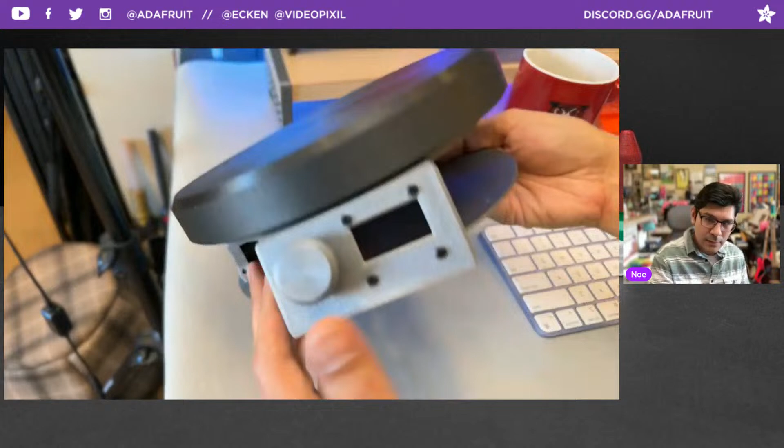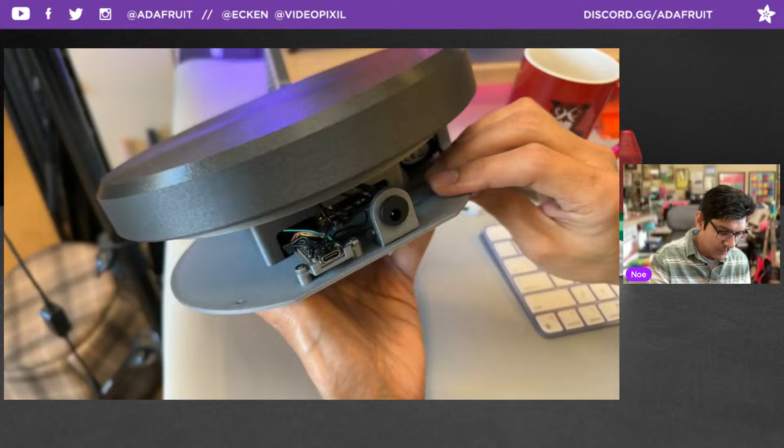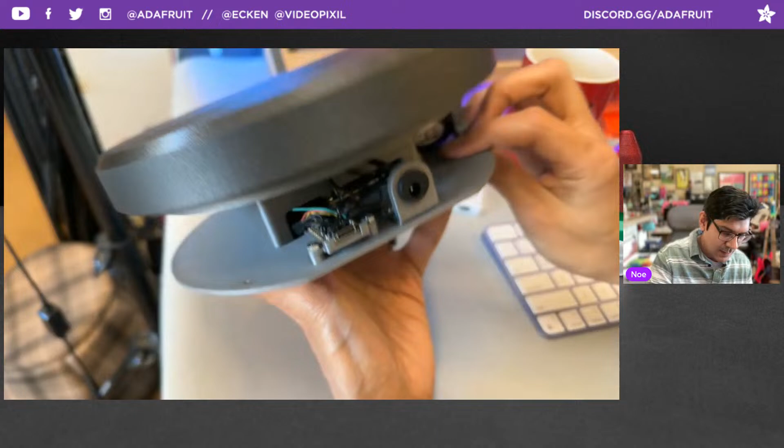So what we have is a couple of 3D printed parts. The main thing powering it is a KB2040 right here, and then we have a DC jack to provide 12-volt power. On the inside, you can't really see it, but there is the Trinamic driver, the stepper driver, and a buck converter that takes in the 12 volts and can downgrade it to 3 volts that the KB2040 needs, but still provide 12-volt power to the pancake size stepper motor.

So I got some 3D printed gears. I have another piece that kind of covers this, but I have it exposed here so they can make sure I can test things.

The tabletop is secured to the Lazy Susan mechanism that I ripped out of an IKEA Lazy Susan. One of the interesting things about this print is that I did a concentric spiral pattern on the bottom, on the first layer of this print.

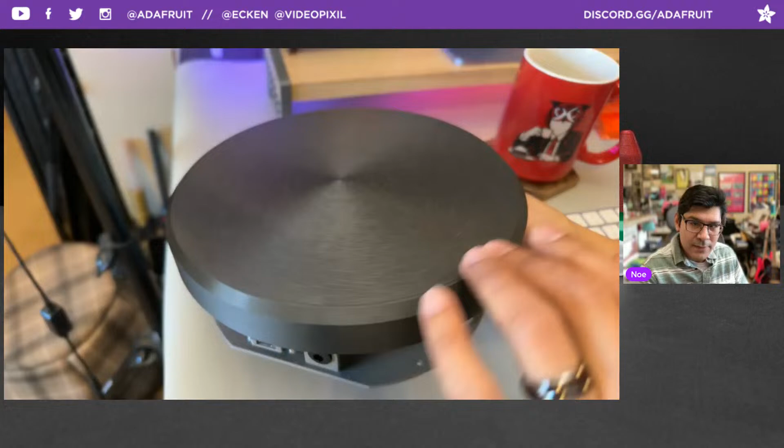It gives you this kind of shiny thing, especially with this glitter black PLA from Hatchbox. It looks really cool, and it gives you a point of reference of where the center is. Kind of a neat little thing about the 3D printed part. But yeah, this is what we got going on.

I'm really digging this low profile stepper motor, although we don't carry these stepper motors - maybe I would suggest it. The idea here is to control it with a Stemma QT rotary encoder. I got this nice knob on a rotary encoder with the Stemma QT cable that makes it easy to connect, and then an OLED display.

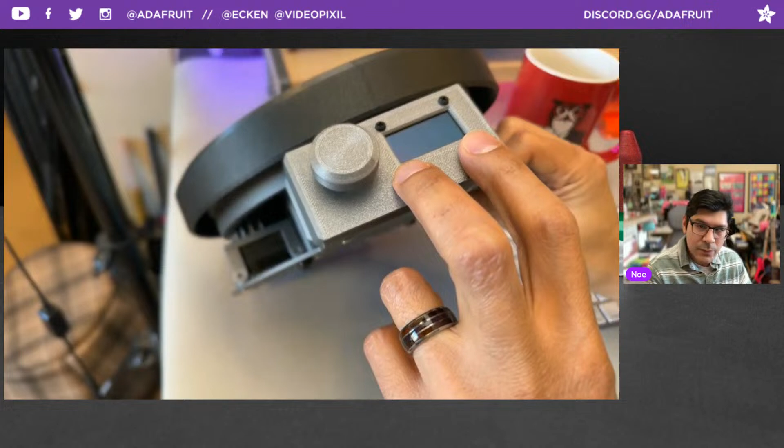This is the 1.3 inch OLED, just a black and white OLED. The idea is that you'll have an on-screen UI where you can select direction and speed and maybe the steps - we're still kind of working that out. We're collaborating with Liz on the CircuitPython code.

It's got this little enclosure for it that kind of sticks out, and it's open on the inside here so I can get the wires from the Stemma QT cable into the KB2040. So let me go ahead and power it on.

I don't think I had it wired up last week, but I do have a video maybe I can share next week of just how loud the A4988 is. But again, this is the TMC 2209.

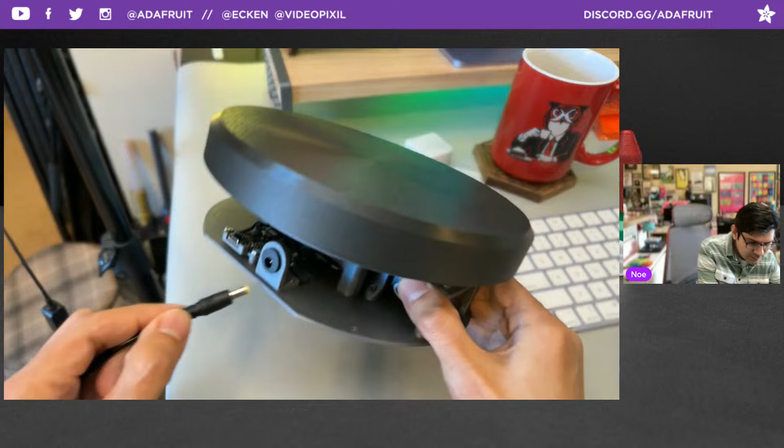I'm just going to step over here and plug in the power. And thanks to that buck converter, I can just power it with this one connection, and it'll power the KB2040 and the stepper driver all nice and easy like.

Right now we just have some demo code. We have a little printout here that says the turntable is on, and then it'll tell you when it rotates the other direction, but you can't really hear it, which is great. And there's the 3D printed gear that just press-fits onto the shaft of the stepper motor - and there it is spinning.

So the idea is, again, that we'll be able to change the direction and the speed of the stepper using the rotary encoder. It gives you the ability to turn left and turn right to select a menu item, and then you have the click here, which is nice for selecting items.

I was able to turn a 6-pound weight, so I know that it can push a lot of torque, which is really nice.

The stepper motor is rated for 12 volts, I think up to 5 amps or so. The power supply I'm using is just an adjustable power supply, so I have it set to 12 volts. On the stepper driver, you can adjust the current limit up to 2 amps, which I have on default right now, and it seems to be pretty good. I'm pulling force on it and I'm not able to stop it, which is nice.

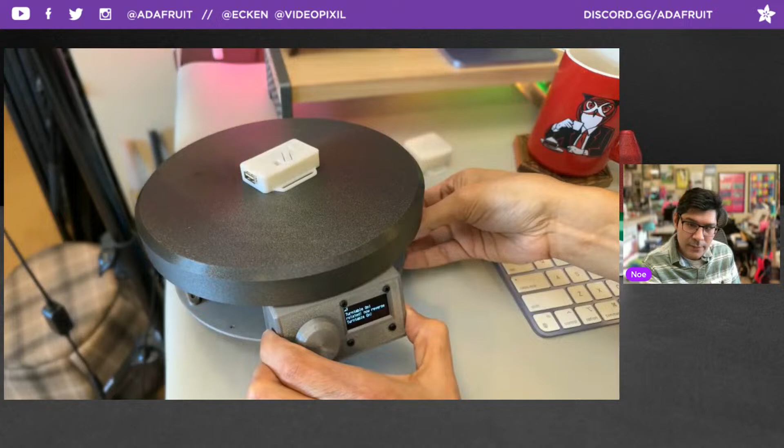So that's the gist of the turntable. We're going to work on the code tomorrow and the day after, and hopefully we can get this project released by Wednesday of next week. There's the screen just saying turntable's on - careful not to drop these. But yeah, that's what we got cooking right now.

I really like that this is so silent. You can, of course, buy a motorized turntable commercially from like Amazon, but I think it's cool to try out our new stepper drivers that Limor's been working on, and she's actually working on a custom library using UART commands, which would be really nice to do some special stuff.

But I've looked around for turntables on Amazon, and I haven't seen one with this interesting interface where it has a screen on it. Maybe it's a little overkill, but we want to make a really nice one, and it's not too expensive because the stepper motor is like $10 or so - not a bad deal. Speaking of which, this is the stepper motor that I'm using.

Let me remove that, go over here. There we go - it's a NEMA 17 sized motor, but it's got this really low profile, which is nice. Same mounting holes as a normal NEMA 17 big version.

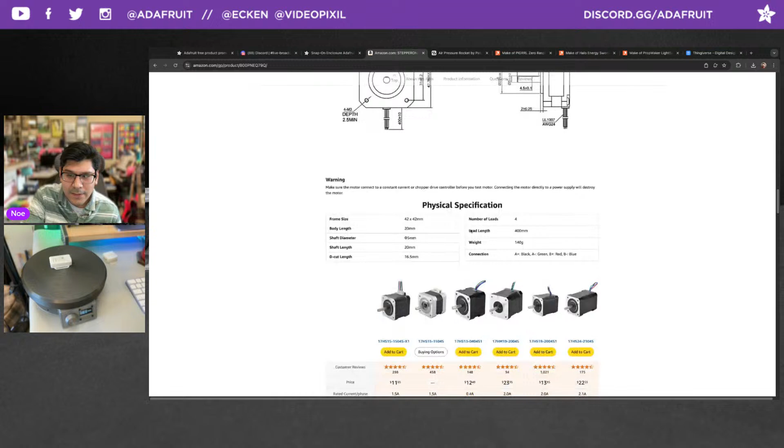It's from a brand called Stepper Online, rated for 12 volts DC. There's some nice data there. It comes with a nice diagram and a spec sheet that lets you know what the wire connections are, so it's really easy to connect this up to the terminal blocks on the Adafruit TMC 2209 stepper driver. And they have a whole bunch of different ones.

I'm digging this low profile one because it makes the base of this project nice and relatively slim. You can see here, I have some extra room just because I want things to not smash into each other. So I got a little bit of height there, but I think it works well.

I can, of course, swap this out for the original thing, which I do have in today's video. It's just using the same mounting holes because the Lazy Susan has these mounting holes, and I just unscrew it and screw it into the wood with these wood screws. But I just have this here because it actually fits better on my desk.

And it's all 3D printed, and I kind of want to talk about that cool effect that you get. That's an interesting spiral radial effect when you select that in your slicer.

So that's the gist of the project. I think I covered everything. Let me check in on Discord and see if folks have any questions about it.

Tyeth is asking if I have tried a larger stepper originally. Yes, I have played with a regular stepper motor. If we go to the Adafruit shop, we can search for stepper. This is the one I've used before on the Circuit Python camera slider project. I just wanted to try this shorter version of it.

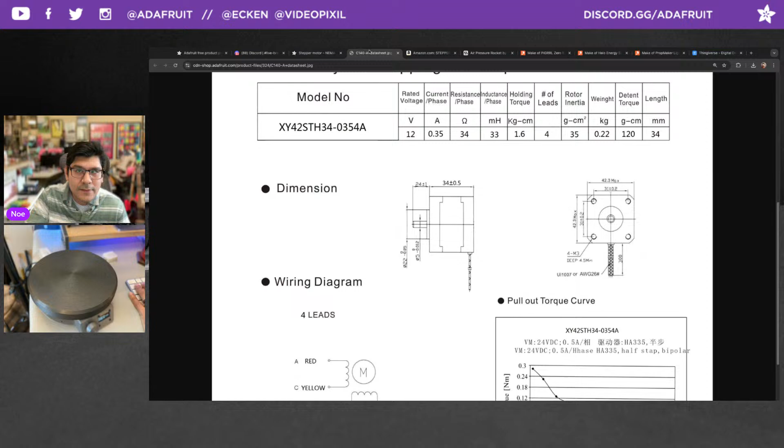But yeah, they're pretty much the same, 12 volts rated. And you can swap them in and out, which is nice with the screw block terminal on the TMC 2209, which is the stepper driver.

So if you want to pick these up, they actually are in stock. They are really nice. I really like how silent it is, you can't really hear it.

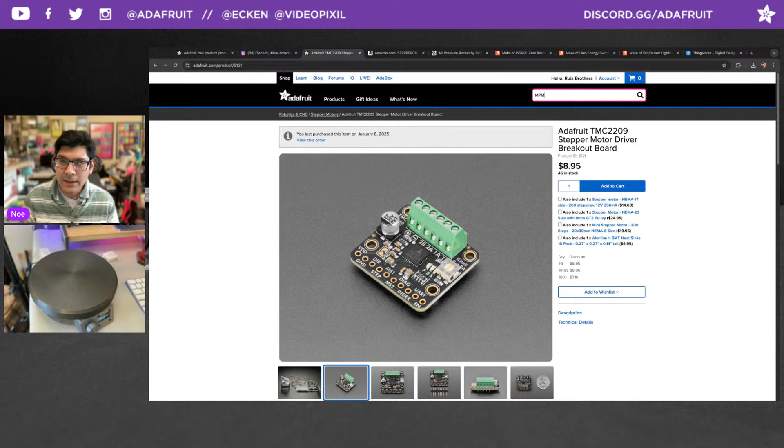But yeah, that's the driver. And the other thing I'm using for the power is the MPM. Yeah, I'm using this thing here. This was a recommendation from Limor. It can take in up to 21 volts, and then it can do 5 volts out. So it kind of steps it down so that I can power the KB2040 dev board, and then also power the stepper driver and the stepper motor with 12 volts, not through this thing, but sharing off the DC line and the jack back there.

Tyeth is saying the pancake shorter version is neat, presumably less current too. Maybe useful sometimes, although the normal one in the store is really low current. Yeah, I see that.

Good stuff. Okay, so hopefully next week we'll have a nice interface and we can adjust the speed and the direction, which I think is the main things that we want to do with the turntable.

And if folks don't know what a turntable is normally used for, it's for video production, photography. That's pretty much what they're used for. I've always wanted one. Pedro actually has one that he got off of Amazon, but it's pretty simple. You just turn it on and it goes, you plug it into the wall. Pretty similar to what I got going on, but it's nice to have the speed control and motor control.

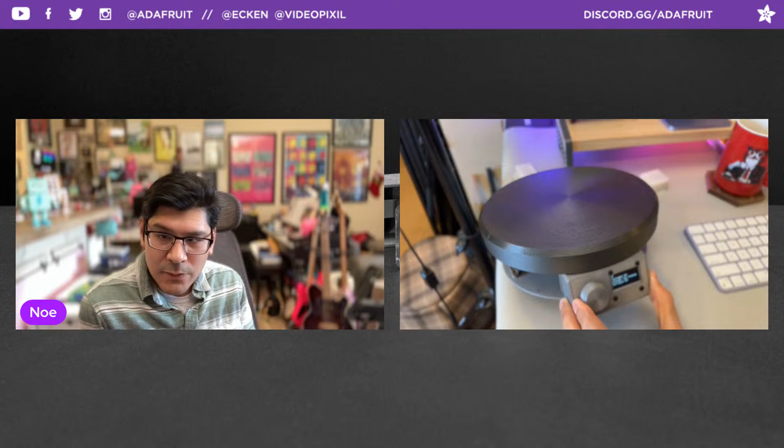And I think with the UART command, we might even do ramping to do some cool speed up and slow down kind of effects, would be nice.

So yeah, this week we wanted to do a video on our 3D printed cases that are produced by JLC PCB using their 3D printing services. We are stocking these in the store. We have, well, I've lost count, like 6+ versions, different cases.

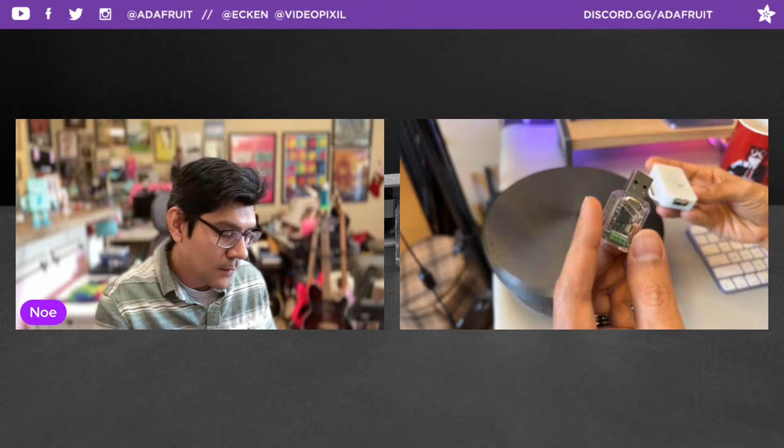They come in 2 different versions. Most of them do, or at least one of them do. We're still experimenting with which ones we want to carry. But we have this clear resin and this milky white resin that's available. They all have Adafruit, most of them have Adafruit logos on the back of them. They snap fit, no screws are required.

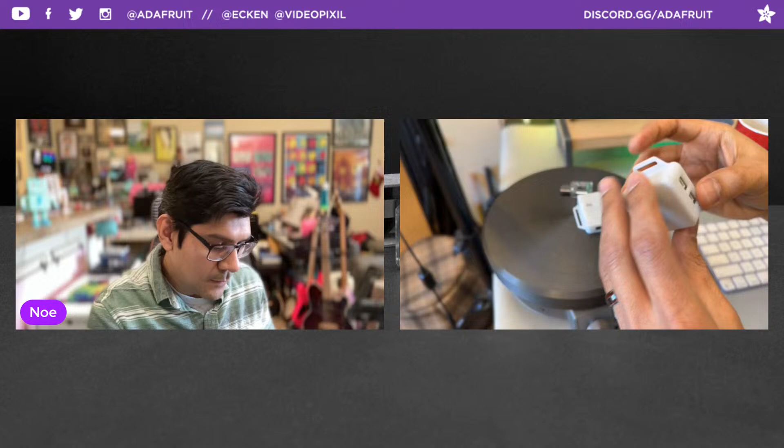So we just wanted to come out with a video to promote that these are available in the shop, and we are working on more. I actually have some on order. Folks can always let us know what enclosure we should design next.

I try to make these high quality since they're printed in resin. We can do some fine details like onboard text. So here you can see it says DC in, USB here, and over here some text that says bat and load. On some of the other ones, we've got the Adafruit logo on the bottom.

They have these mounting tabs that are useful, M3 sized, so folks can attach these to a surface, like a piece of wood. This one has screw block terminals, so we have exposed ports for those, and on top you can still screw it. This one says ground, and then I believe 3 volts and 5 volts.

I'd have to change the lens here, but you can make out the text, and it's printed in this white material so you can see the LED shine through, which is nice. Here you just have a plus and a minus, nice and big, and then USB there, and the JST PH jack there.

So we have a few of them. We also have the Trinkey ones. It didn't make sense to create mounting tabs for the Trinkeys because these are ideally going to plug into a port. Most of the boards that have onboard buttons try to create these press tabs, so you can still select them with the covers on. Most of them are 2 pieces, with the exception of the QT Py version. And this is just an empty one here.

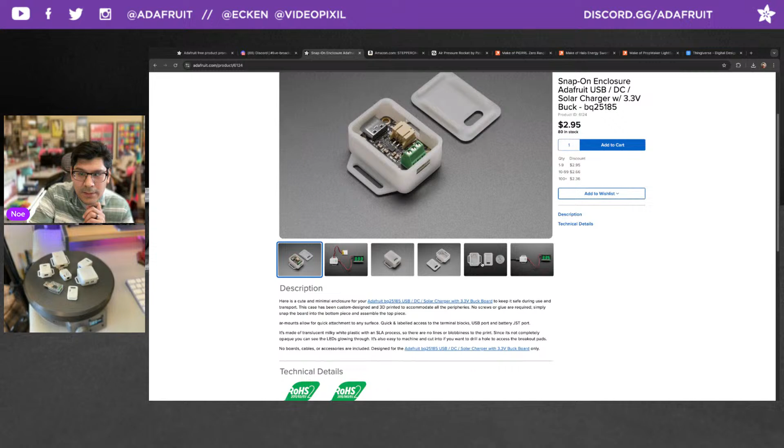I have a turntable so I can show them off all fancy like. These are in the Adafruit shop. If you go to /new, you can see this is the latest one we have in stock. It's the Adafruit USB solar charger with the 3.3 volt buck. And did I mention, no screws needed. You just line it up, push it in, and snap the case on there.

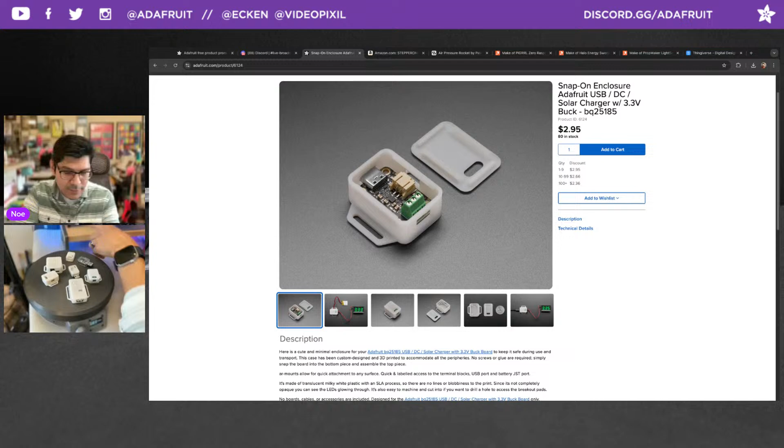I always do my best testing them out before we get them in the shop. I order them on JLC PCB and test it out, make sure all the tolerances are right, all the ports line up, and then I approve it, and Limor will take a look, and she orders them up.

So this is pretty cool. Yeah, I want to make some more. Right now I have the Feather RP2040 DVI Feather on order, and then I think I want to do the Feather 2350 after that. So that's what I'm working on in conjunction with this project here.

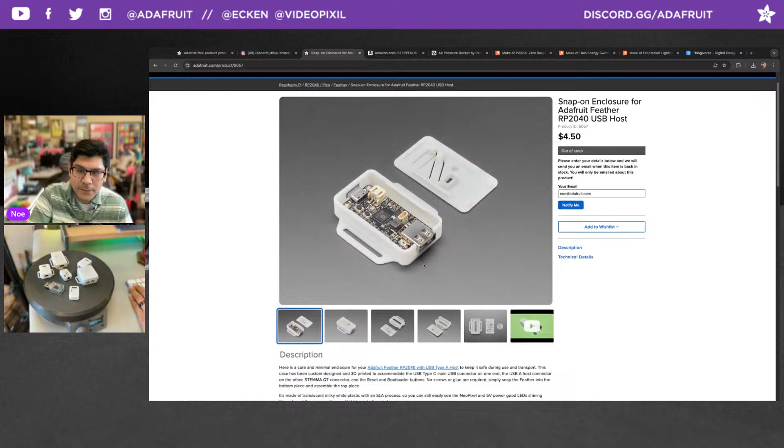So yeah, check out these. This one's out of stock because folks bought it up, so thanks for buying it up. Hope it works out, let me know what you folks think about it. Yeah, we're digging this, so we're gonna keep making some more.

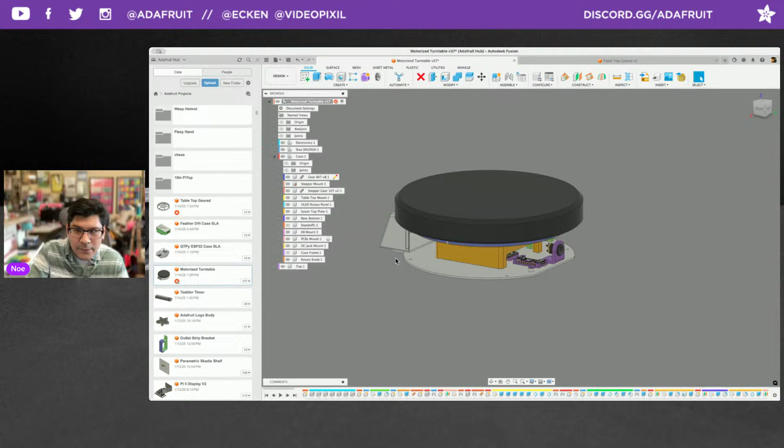Okay, so here is the design in Fusion 360. Let's get rid of the top here. So this is what it looks like without the top cover on.

You have this mounting plate that attaches to the Lazy Susan mechanism. Let me see if I can isolate the Lazy Susan mechanism.

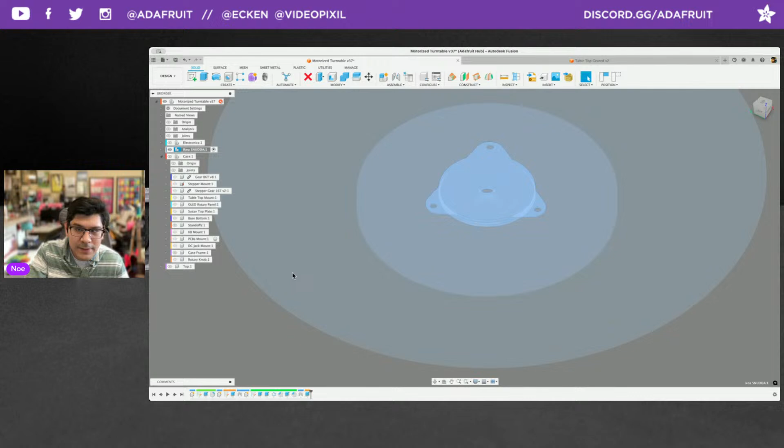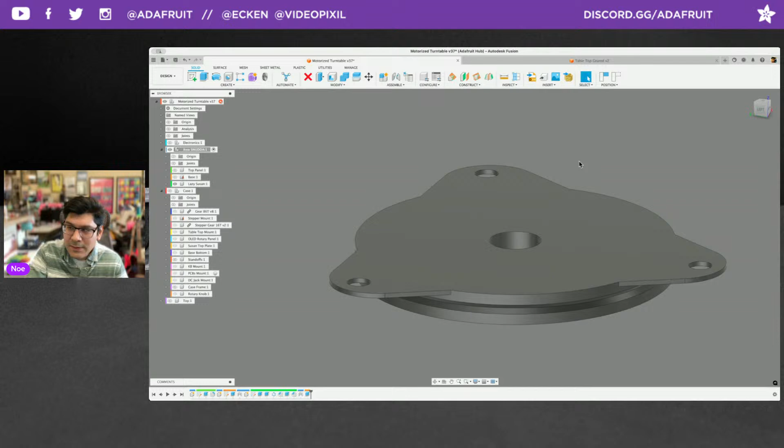So I started off this design by designing this mechanism. This is what it looks like, more or less. It's got two pieces, three mounting tabs that are about 5 millimeters in diameter, and there's a center hole there. These are two pieces with a little bit of gap between them, and I did apply a little bit of lubricant to smooth it out because it was a little dry, so I might recommend that in the Learn guide. But yeah, it's a pretty small, low profile Lazy Susan mechanism.

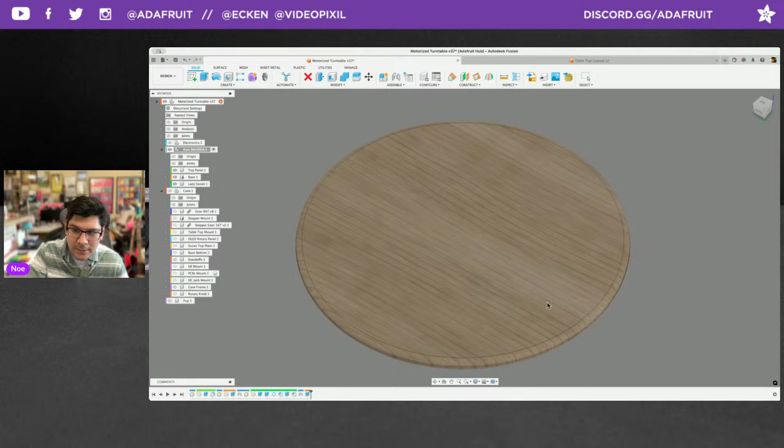And then I went ahead and modeled the base. It came with this pretty thick, solid piece of wood, just a bolt in the center with a nut. But this is the model - it's 15 inches in diameter, which is fairly large, and 16 millimeters thick. I basically started off with modeling this first, and then modeling the things around it.

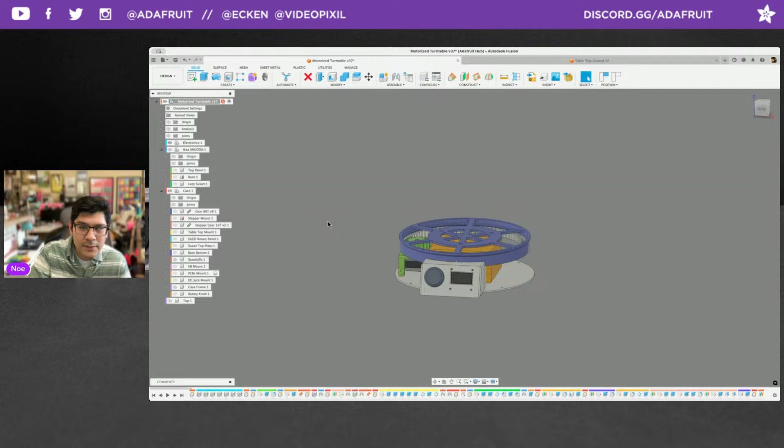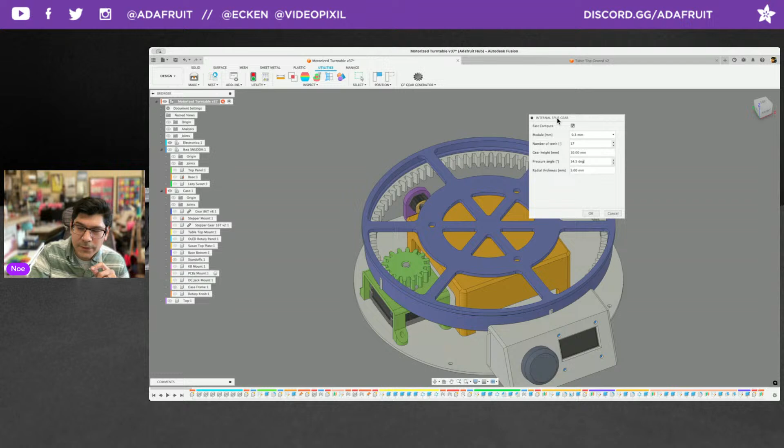So let me hide that for a second and take a look at the rest of the stuff. For the gears I'm using a plugin in Fusion 360 called GF Gear Generator - I've been using this for all my geared projects. It's kind of like a Python script that lets you select your module size, which is the size of the teeth, the number of teeth, the height of the gear, your pressure angle, and your radial thickness if it's an internal spur gear, which this is.

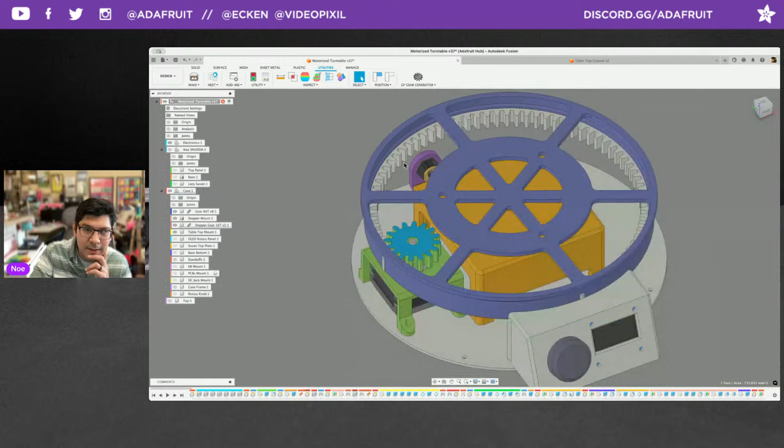So it's an internal spur gear, and the gear for the stepper motor is just a regular spur gear. For this particular one, I went with a 2 millimeter module size. 16 teeth for the stepper motor and 86 teeth for the tabletop base that attaches to the Lazy Susan. That's how I was able to create those. I used some joints to position the motor, and I'm using motion linking with some revolving joints to figure out how far of a distance these gears should be from each other.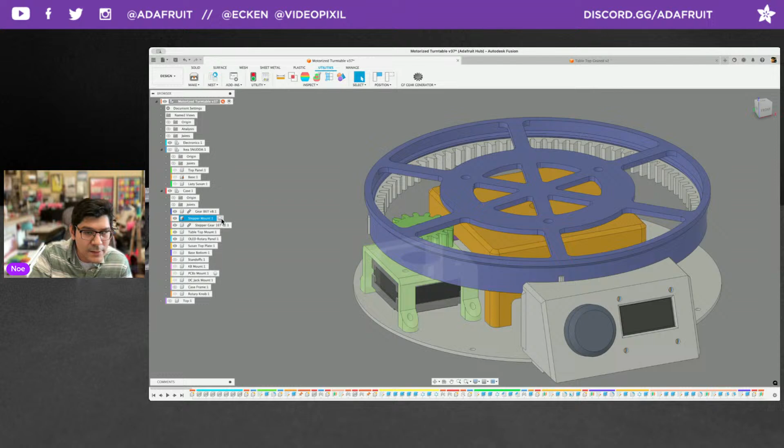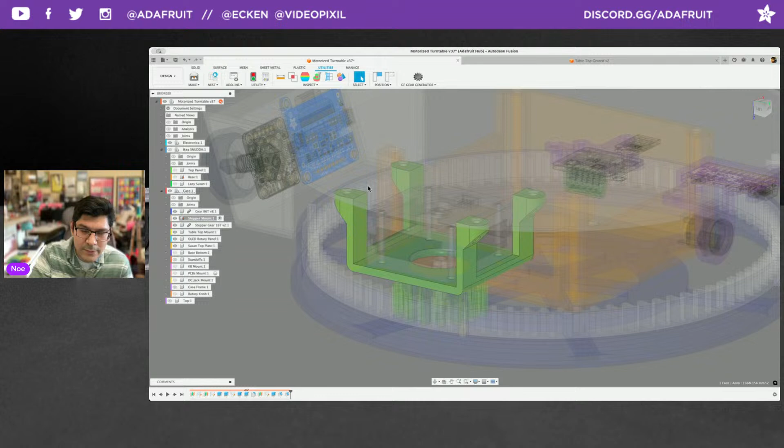And then the motor mount itself is this green thing here - there it is, I have it selected. It has 4 mounting holes with a center hole for the shaft of the motor to pass through, and then these kind of thick mounting tabs with drafted edges so that I can 3D print this upside down like that. They have M3 size holes so I can secure it to the bottom plate. Pretty simple, no supports needed again for it, and I think it's like 3 millimeters thick, so hopefully plenty thick. Seems to be nice and rigid.

What are some other pieces here? Let's take a look at the electronics, how they're mounted. I figured I'd use this panel mount DC jack - it has its own kind of mounting tab. And then the KB2040, it doesn't really have any mounting holes.

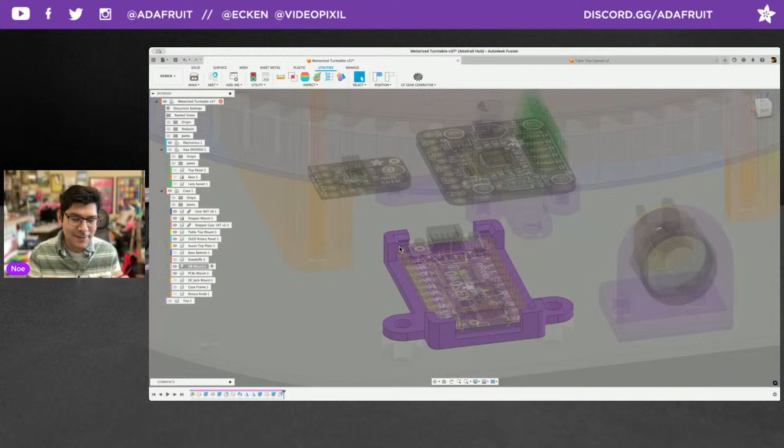So I came up with this special snap-fit mounting plate, or bracket I guess we can call it, with some chamfered edges that allow you to flex the mount so you can get these little nubbins underneath the PCB itself. Let me see if I can get a better look at this - yeah, so you can see here how it just about clears and covers it so it doesn't move out of place.

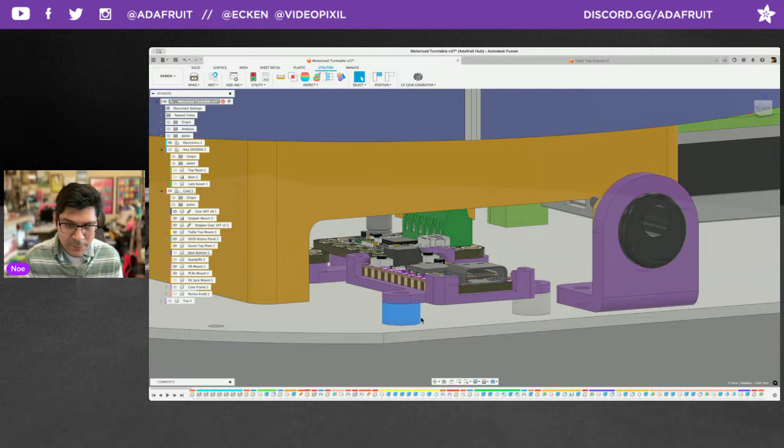But then it has these mounting tabs on the sides, so I can attach that to the bottom plate with these built-in standoffs that are part of the bottom plate, and they're just M3 size. So kind of a neat idea.

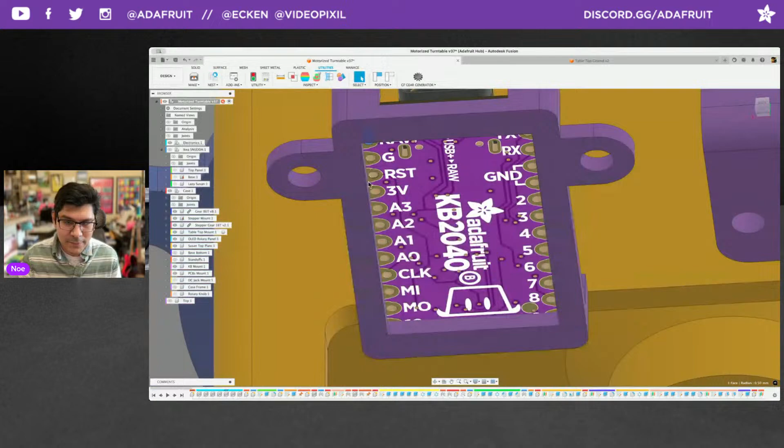And then the bottom of the mount has enough clearance for the pin holes, the castellated pads, to kind of have a little bit of room in case you have extra solder or pins that show through.

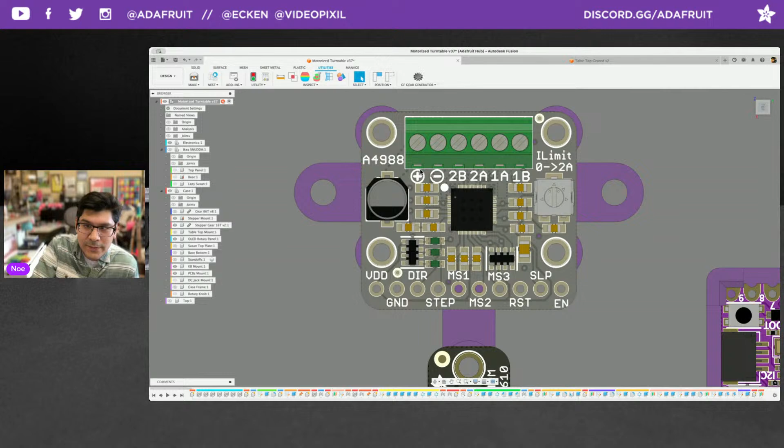So that's working. Let me hide the gear and this plate here. And then I have another PCB mount for the TMC2209 - you can see it's pretty much the same mounting holes as the A4988 stepper driver. I didn't add it in here because I haven't created a 3D model of it yet, but it has the same mounting holes, so maybe I'll update that later.

And then here's the 5-volt converter for taking in the 12 volts and downgrading it to 5 volts. So they're all separate mounts in case something changes. I could always change this out instead of having it built into the bottom plate, because then I'd have to print the bottom plate all over again.

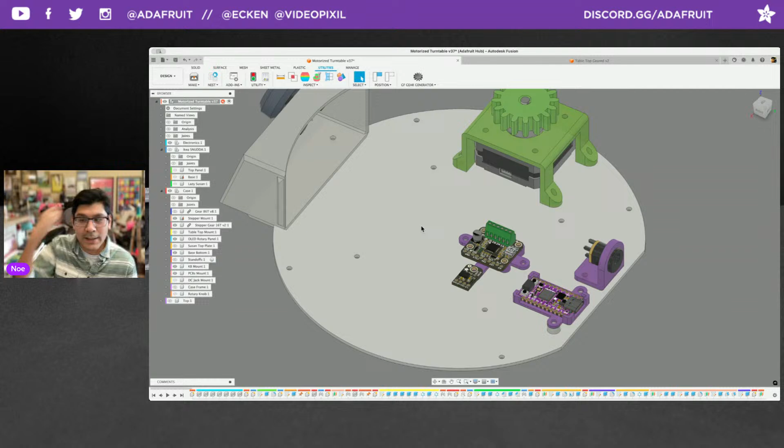So that's one of the things I like to do, is to keep all my things modular. You can see here the bottom plate just has a ton of these mounting holes for all the various PCB mounts. The only other enclosure bit is the OLED rotary panel, which is pretty simple.

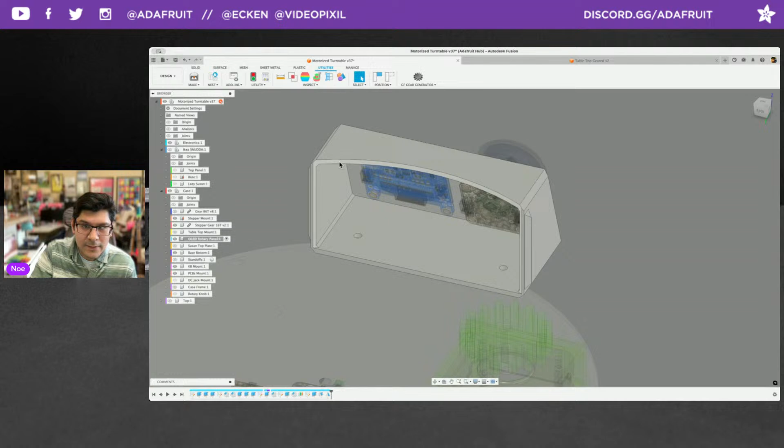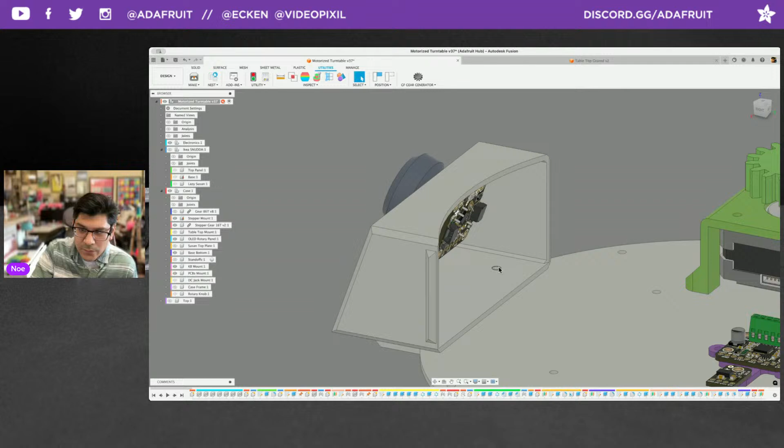It's got an interesting kind of drafted edge for the faceplate, and it's got this nice rounded cutout, and it's open on the back here because it allows the table to kind of pass through it. So there's the OLED, and then the rotary encoder there that just gets panel mounted, and there's some M2.5 screws that will secure the OLED to the 3D printed enclosure. And then there's 2 mounting holes here that attach to the bottom plate.

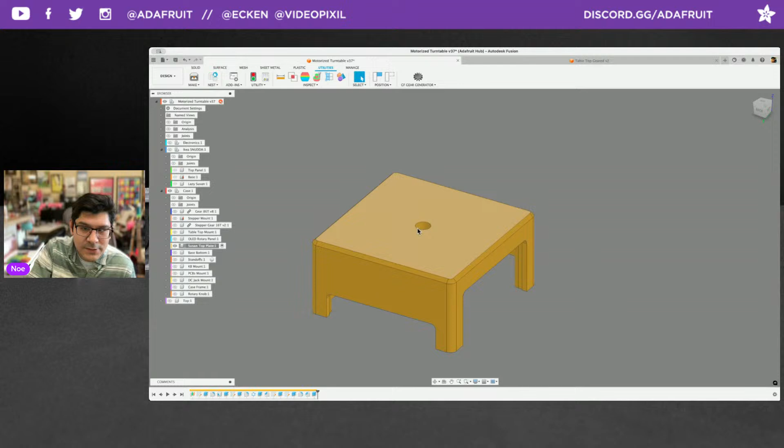To keep the Lazy Susan supported, I had to come up with this part here, which I'm calling the Susan plate. I should probably come up with a better name. But it basically just allows you to attach the Lazy Susan using the bolt and nut that came with the IKEA Lazy Susan. So the nut goes in here and the bolt goes right through there. I haven't modeled the bolt, but that's basically what it does.

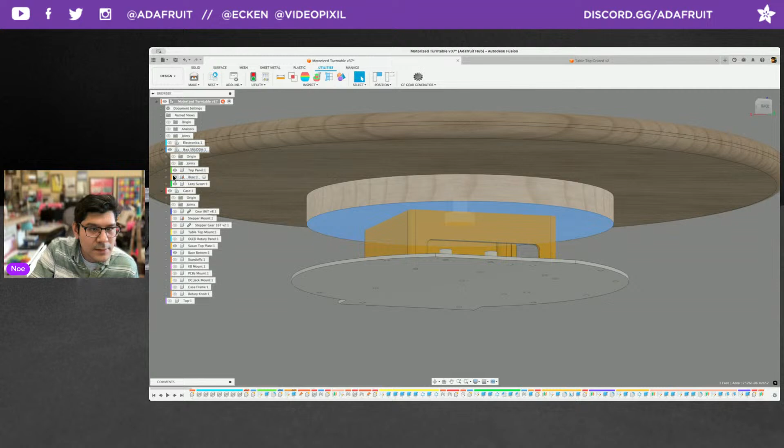So this attaches to the bottom base, and then the Lazy Susan is attached to that plate there. So there you can get a good look at how it's kind of working.

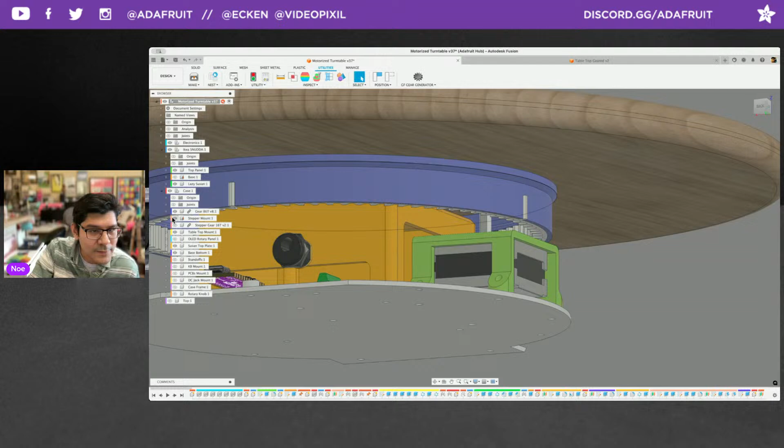And then once you add the 3D printed tabletop mount, and then add the teeth, and then the stepper motor - where's that stepper motor? There it is. And then the stepper motor gear - where's the stepper motor gear? Right there. And there you go. That's how it's all working together.

A lot of times I'll use a section analysis, which lets me see a cross-section view. Let me see if I get a better view of it. Maybe this way - yeah, this way I can kind of see how all the clearances are working out.

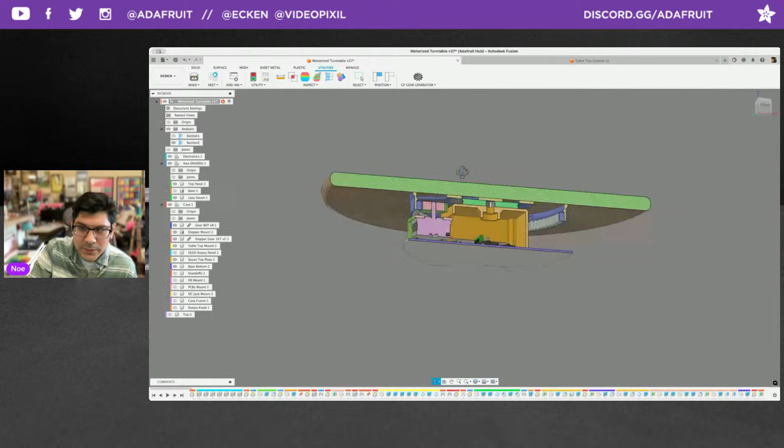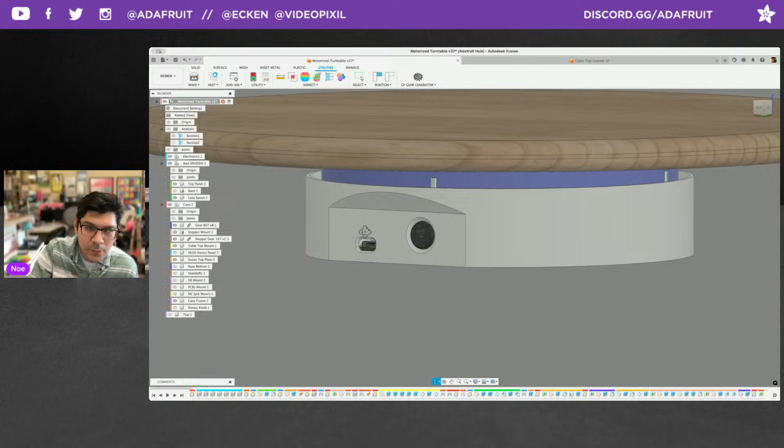Yeah, so that's pretty much the design. Oh, and the last bit is this frame here that kind of covers it up. It gets attached to the bottom plate and has these built-in standoffs. There, you can see the mounting tabs here - there's just 4 mounting tabs. And then it has these openings here with a flat surface for the DC jack and the USB-C port of the KB2040. So there you go.

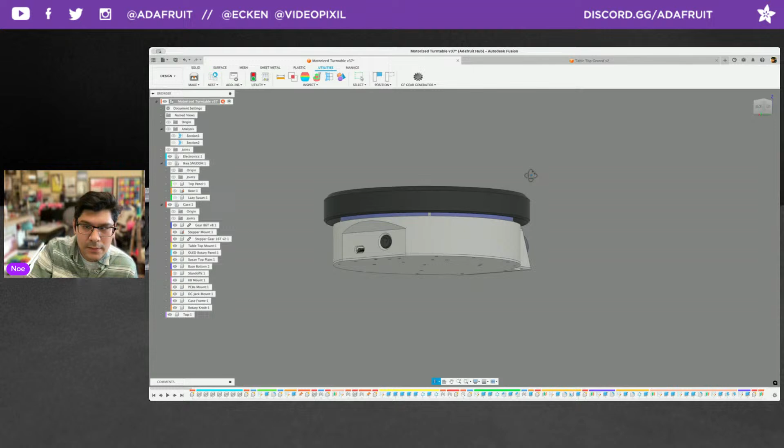I think that's going to do it for the CAD stuff. Of course, the 3D printed knob is its own thing. Yeah, so I'll share this file next week when I release the Learn Guide for it. But yeah, it was a fun one to come up with. Continue to make more spinning projects with motors. So that's fun.

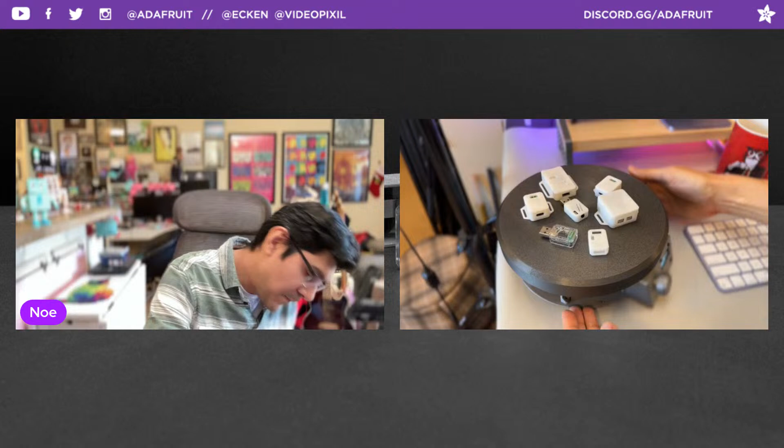It was suggested that the stepper driver can get a little hot, so I'm probably going to add one of these little heat sinks to it just to cool it down, and I might add some ventilation to the 3D printed bottom and the kind of framing that's supposed to cover it.

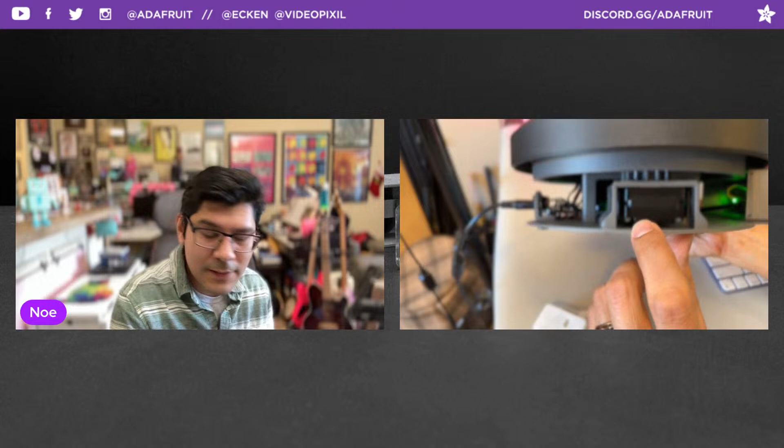Whoa, I just dropped everything. I'll probably add some ventilation holes on the side here so that if the motor gets hot, it'll have a little bit of ventilation. But so far, so good. Fingers crossed it doesn't overheat. I do have some clearance here, so in case it does get a little hot, it'll cool down.

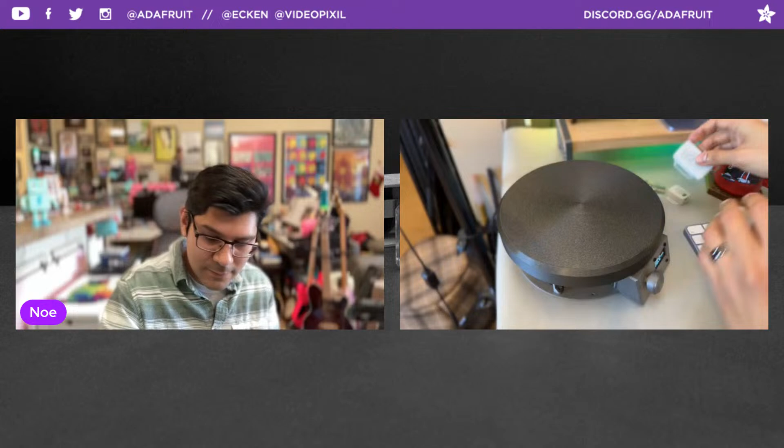Oh, it's out of focus. Come on. Luckily, I have carpet, so nothing broke. Good test of the parts.

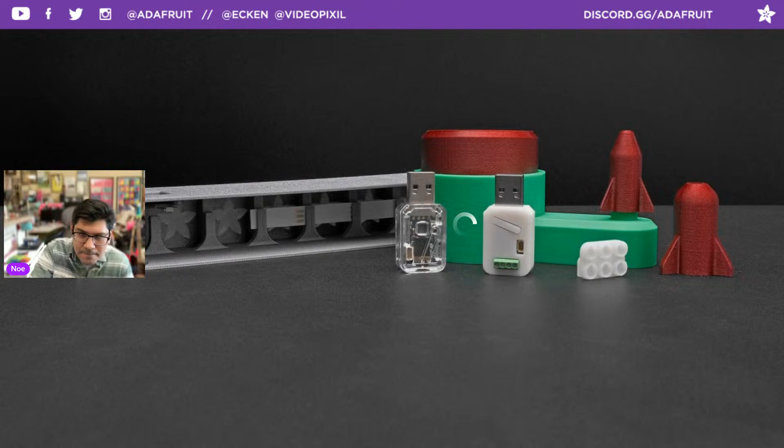Next up, we have a Time-lapse Tuesday video that Pedro put together this week. It's this air pressure rocket.

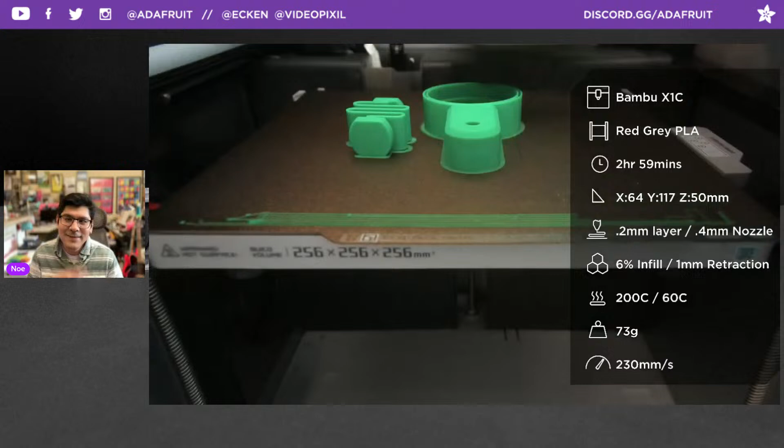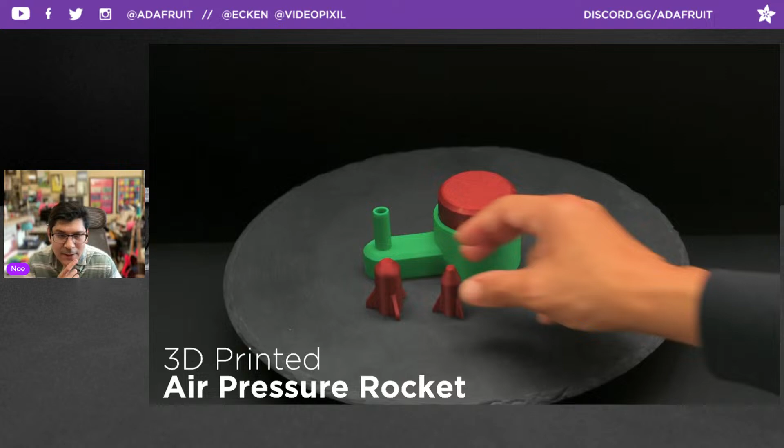It's designed by PatoPato Designs. Wish I could talk more about it, but it's a fun example of using a 3D printed spring and a button, launching little 3D printed rockets by pushing down on that button. Seems pretty interesting that you can make something like this with all 3D printed parts. Maybe next week Pedro can talk to us about it.

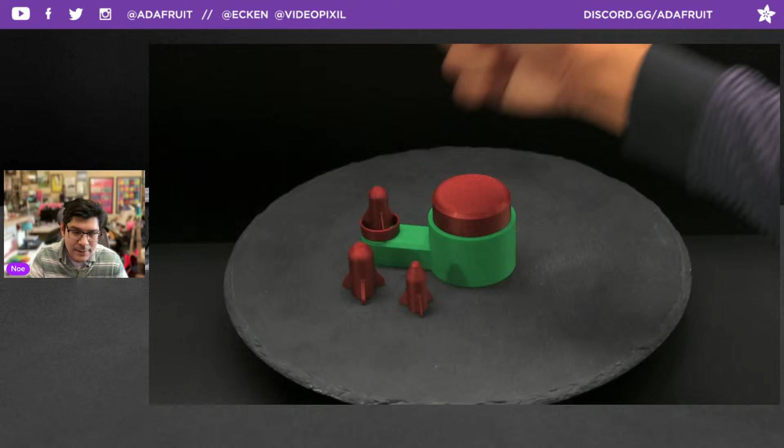It is on Maker World, that's where he found it, again from PatoPato Designs. I believe it's a free model you can download. And here is the nice GIF. What is that? It says over 300 centimeters. Maybe that's how high it can launch. Punch and fly, can fly up to 300 centimeters.

Cool. Yeah, I guess it has a tight tolerance, so that when you push down on the button, it can push air through the little channel here and then send the rocket flying. Kind of a cool physics example.

It's really interesting. I haven't printed it myself, but Pedro did, and I think the kids enjoy it because I saw him post his nephew playing with it. Seems pretty cool. Just a couple parts, and you got yourself a fun little physics toy that's all 3D printed. Pretty cool.

All right, next up we are going to jump into community makes. These are some posts that were shared with me.

Starting off with this make of the Raspberry Pi Zero Game Boy build. This was posted up by Baka Sanke, and they are working on the build of the Pi Grrl, is what we named it - it's the Raspberry Pi Zero Game Boy build. They said, cool print, I'm still waiting on some of the components so I haven't built it yet, but it looks super high quality and it press fits really well.

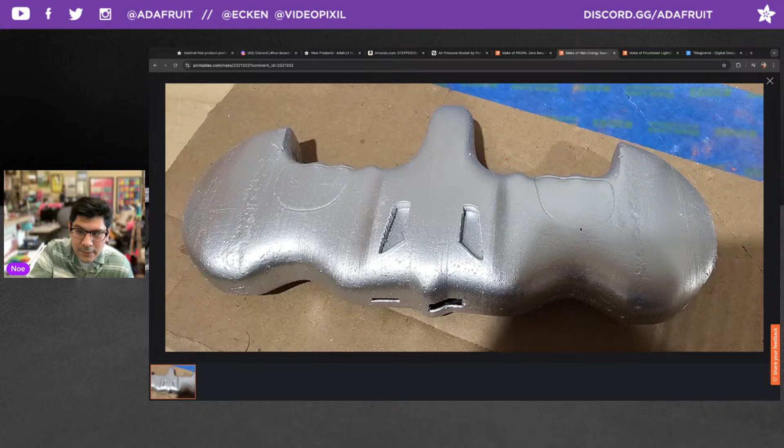Very nice, good stuff. After that, we have a make from JS94 of our Halo Energy Sword prop. They just made the handle to go with my collection of lightsaber hilts that also have no blade. Yeah, it looks like it's been sanded and spray painted or painted. This is a cool design that Pedro came up with a couple years ago, and I think he redid it with the RP2040 prop maker not too long ago.

Very cool. And then after that, we have another make of the prop maker lightsaber. It looks like these are just the mounts for the PCB, so they're probably still working on it. No comment, but it was posted up by a photo rammer.

Cool. And to end off this week's community makes, Aero Steve O posted up their make of the NeoPixel LED gas mask. And this looks really fantastic. I think I came up with this project a while ago, like 2014 maybe.

It uses the NeoPixel ring in the filter area, and then it has some EL wire, I believe, on the goggles, because Adafruit stocks these goggles, and I thought it'd be cool to make a semi steampunk sci-fi inspired Vader mask prop with these lights and the EL wire, when EL wire was like the thing to use in props.

Nowadays we have LED noodles, which would be a lot brighter. So maybe I'll revisit this one day. But yeah, it was cool - it's from when I was first getting into props and stuff, which is pretty cool.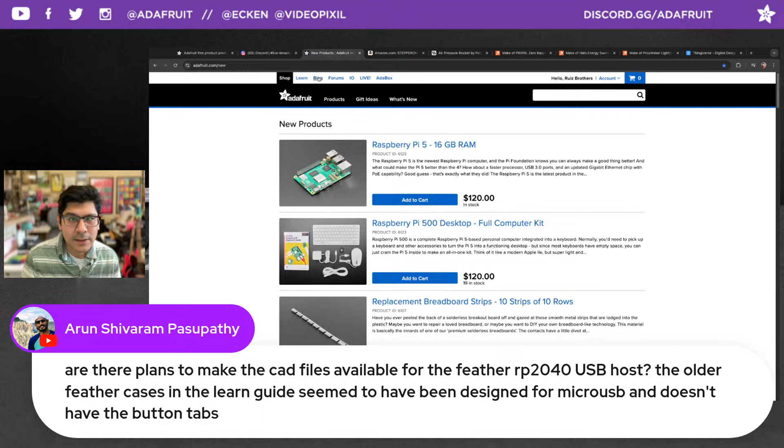Ah yes, I remember that, it was the Feather box. Yeah, I think at some point I need to create a new Learn Guide or dedicated GitHub repository with all of our SLA cases that we're stocking, because there's really nowhere to host them yet. So I'll have to work on that. But those aren't easily available yet. I don't think I have the Feather host available. Let me take a look here in the Learn Guide real quick. Then I think it makes sense to start posting links on the product page so it's easy access.

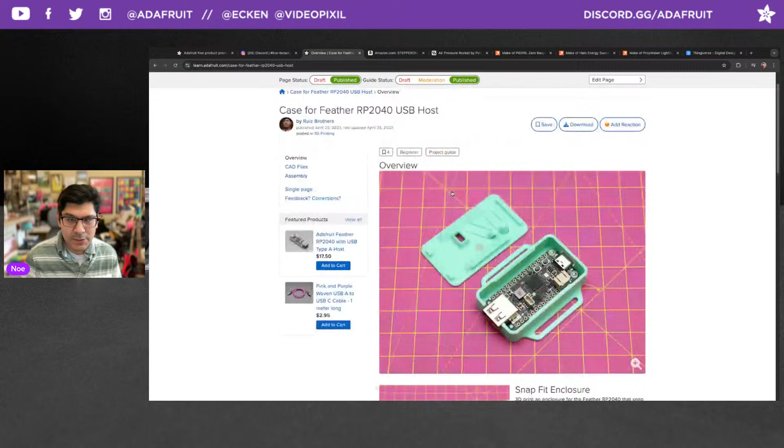Actually yeah, this one is out. Cool, I guess I did do a case for this one that was originally just a PLA 3D print, and only later did we start stocking these for SLA. So let me post that up. That works, yep, no problem. I'll go ahead and post that one up for Arun so you can check that out. Most of these are available. Some of them I don't think, like these solar cases, I don't have them up yet, but I always try to release bigger cases, like for feathers, especially because they're dev boards and they get used a lot. But we'll work on that. That's a good suggestion, cool.

All right, give folks a couple seconds here. Let's see, we got one from Tyeth. Do they qualify for the CAD parts repo? Do they have a product ID? That is true, yeah, they do have product IDs, so you should be able to just add them to the GitHub repo, CAD parts. Yeah, that's a good idea.

All right, that makes it easier because it's already a repo. Yeah, good idea. That's what I'm gonna do. I think after the show, I'll start adding these cases with their PIDs. That is that, thank you Tyeth. That really helps out, I didn't even think of that.

Yes, toe beans, all right. I think that's going to do it for the show. Thank you everybody for tuning in tonight.